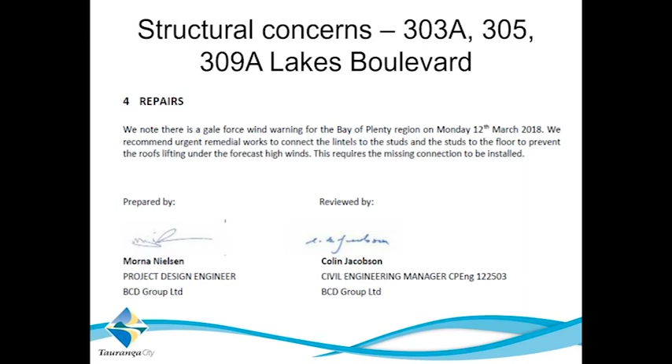Following on from that, we looked at the houses in general, but more specifically the dwellings at 303A, 305 and 309A, because these were the dwellings which were unlined. The reason we looked at these in more detail is that the bones, or the structure, of the dwellings are visible, and we could make a quick assessment as to the level of construction and how significant any issues might be.

As background for a dwelling, you generally consider the occupancy or gravity loads which act vertically, and the wind loads and earthquake loads which act horizontally. As these three houses were incomplete and unoccupied, of these three load types, the wind load was considered the critical issue that could have caused damage to the structure and the adjacent dwellings.

The initial inspection identified numerous structural defects, which were categorised in the BCD report issued on Friday the 9th of March. The ex-tropical cyclone, which weather forecasters were predicting would come through the Bay of Plenty on Monday and Tuesday, could bring gale force winds and heavy rain. The preliminary calculations that BCD completed indicated the gale force winds could induce enough uplift forces to damage the upper levels, or the roofs, of these 3 buildings.

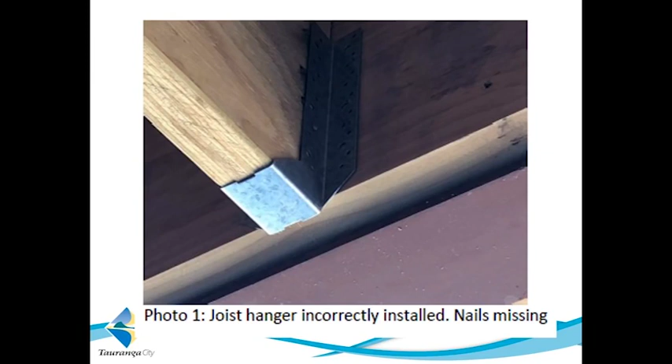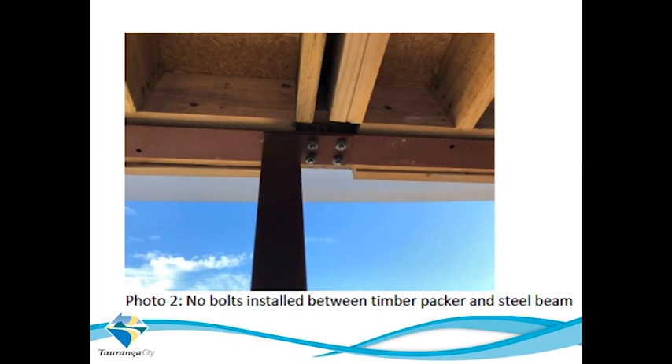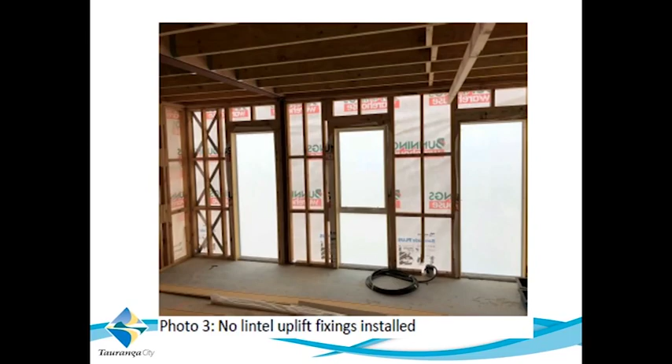In all the cases we looked at on the 3 dwellings, none of these connections were present. The consequence is that in strong winds, when there's an uplift force on the roof, unless the lintels are correctly and securely connected down to the floor, there's a risk that the roof can lift off.

Our concern, obviously in this case, was that the first floor was not connected to the lower level. So in strong winds acting on the side of the dwellings, or in an earthquake, there is a potential for the building to disconnect.

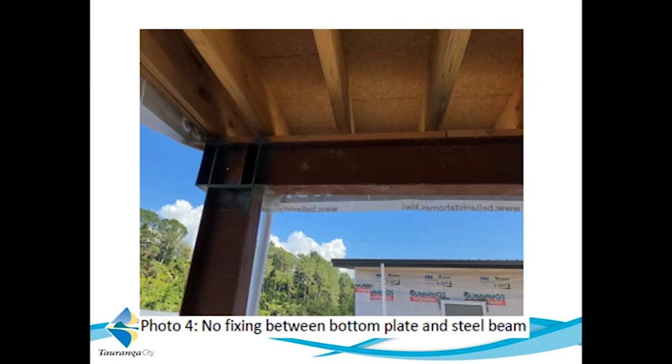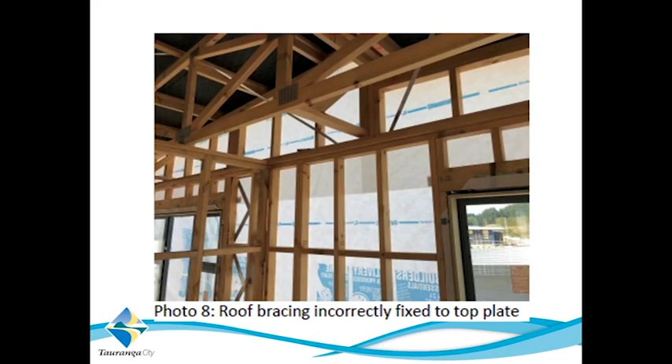In summary, all of these structural issues which we identified drew us to the conclusion that these 3 buildings were dangerous and required urgent works, which were completed by the council on Friday.

Finally, I am a CPEng engineer and a chartered member of Engineering New Zealand. As part of our professional obligations, I am bound by a code of ethics to identify any dangerous or unsafe building practices and ensure immediate action is taken. In this case, I therefore advised Council of my concerns regarding the 3 dwellings, and urgent structural repairs were undertaken to repair the defects. Thank you, and I'll now hand you back to Kirsty.

Thank you, Colin. When we received that advice on Friday morning, we determined that we needed to act with urgency. So we invited Peter Cooney from Classic Builders to come into council and meet with us. The reason we approached Classic was because we identified the need to bring in large-scale resource so that these works could be undertaken expeditiously.

I'm able to confirm that Classic Builders completed the work by the close of day on Friday, and remember I earlier mentioned that our structural engineer had advised that work would take 3 days. I'm going to hand over now to Mike Trigger, who is our geotechnical engineer from AECOM. Thank you, Mike.

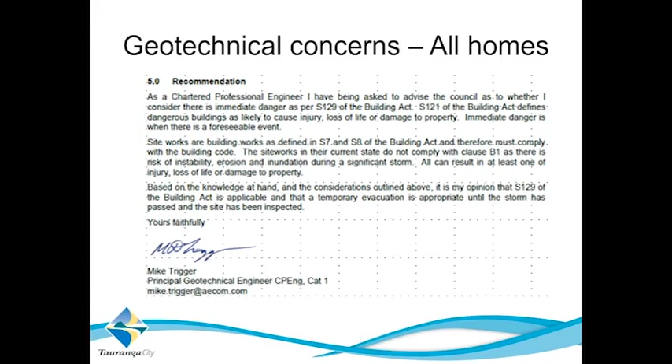As we are in an early stage of our assessment, we are not currently in a position to assess the risk to each individual building. Although some of you have code of compliance, the geotechnical risks can be from works beyond your property. In addition to this, there is clear evidence of subsurface erosion on some of the sites. This presents a risk because we don't know the extent of the subsurface erosion.

In considering the risk during Cyclone Hola, I also considered that the site will change during a rainfall event, and particularly at night, the changes will go unnoticed. Therefore, it was my professional opinion that the sites met the requirements of being immediately dangerous. Like Colin, I am subject to the Engineering Professional Code of Ethics, and it was my duty to notify the council so that you, the owners and residents, could be kept safe.

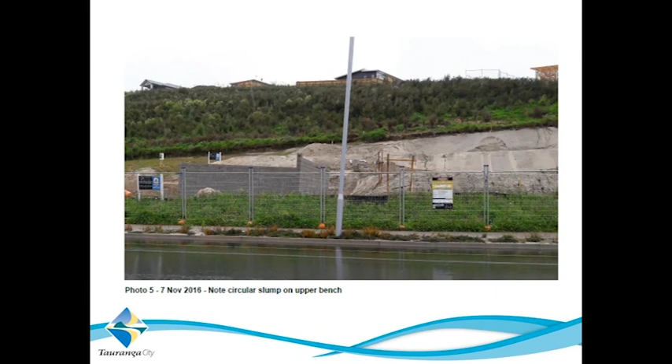This photo was also taken in November 2016. You can see the scale of the earthworks that have been undertaken on this site. What we don't know is how much fill has been brought into the site after the excavations to create the platforms. You can see erosion channels in the slopes in this photo also.

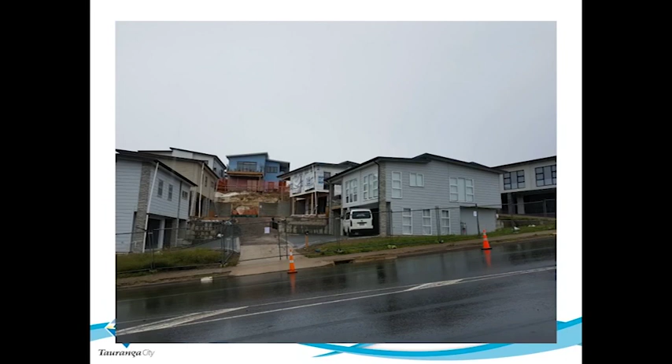This is a photo that was taken yesterday. We have an unstable slope above masonry walls that aren't fully backfilled and below a residential dwelling. I consider this situation dangerous in the terms of the Building Act.

We have engaged a surveyor to undertake a full topographical survey of the current site conditions so that we can work towards solutions for the stability of the sites.

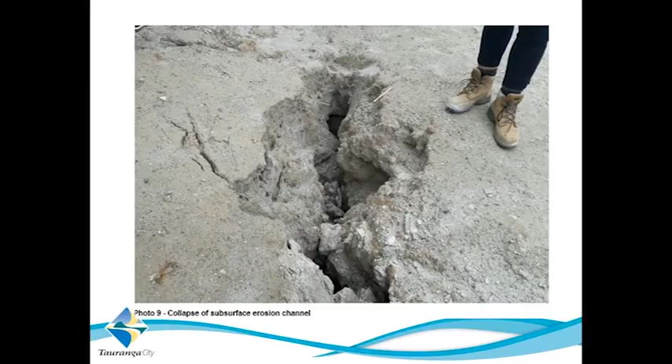Based on these two conditions, the slopes and the subsurface erosion, it was my opinion that the development and all of the buildings are dangerous, and with the forecast cyclone, they were immediately dangerous. We have engaged a geophysics specialist to start undertaking subsurface investigations with ground penetrating radar and shear wave velocity testing, and we expect this to start on Wednesday.

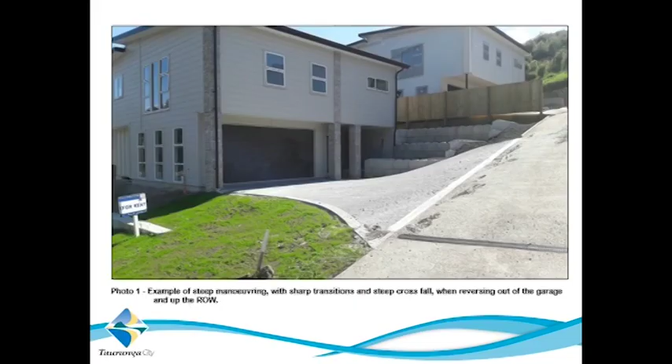I want to now give you a brief overview of some of the other engineering issues that we have identified. We are concerned that some of the driveways, such as the one in this photo, are not functional for on-site manoeuvring and may be unsafe. AECOM's traffic engineer will be providing an assessment of this in due course once the survey has been completed.

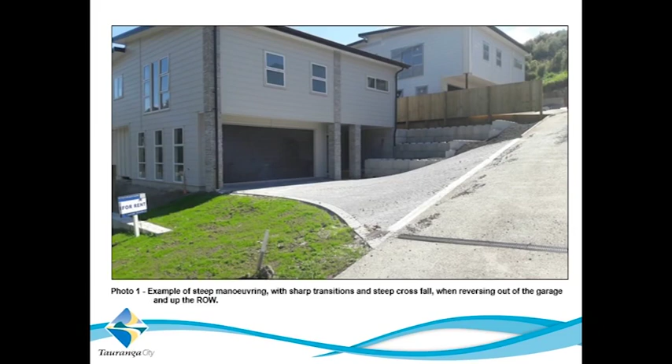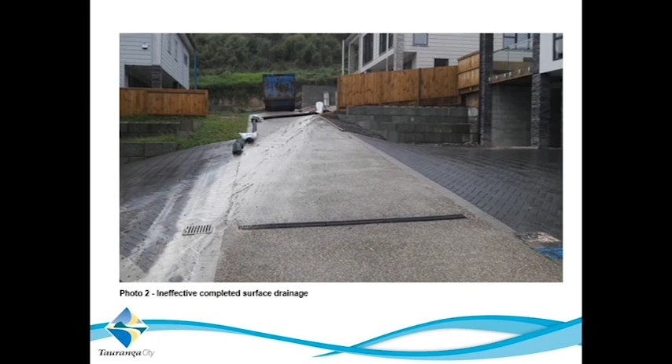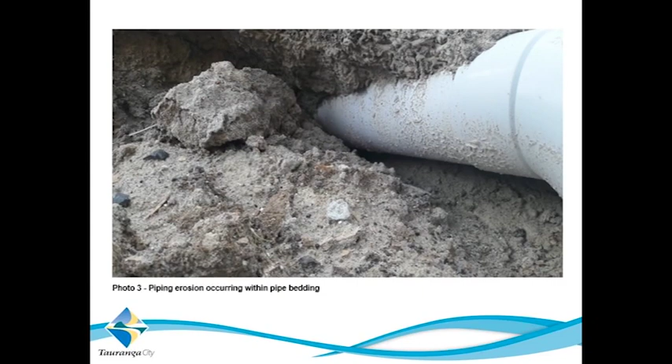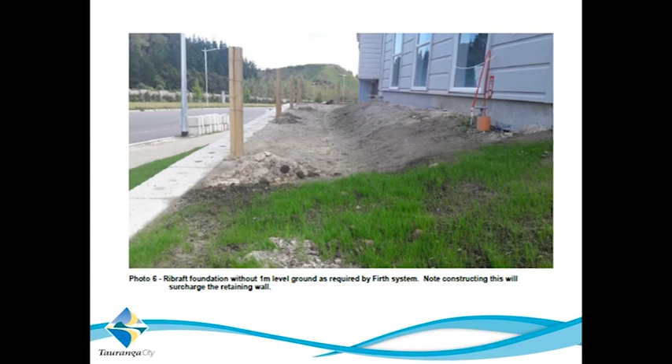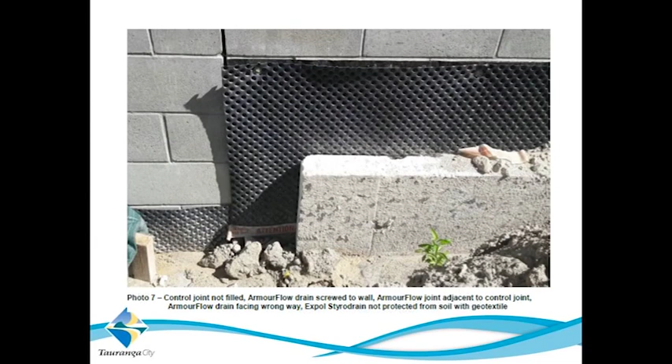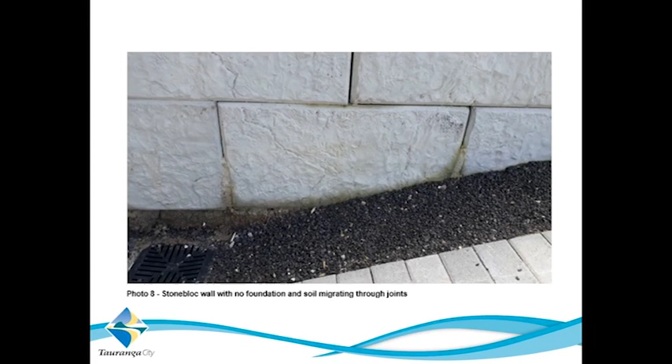You'll appreciate there are quite a number of properties and quite a number of issues. It will take time. The slides I have taken you through today demonstrate the basis for my conclusions on Friday that all 21 buildings were immediately dangerous under the Building Act. Thank you, I'll pass you back to Kirsty.

Thank you, Mike. In this slide we talk about our initial advice. So you've heard from the structural and geotechnical engineering experts. I referred earlier to a property-by-property assessment being undertaken with technical building input.

When Rose McLaughlin was engaged in early February, the focus of her work was to identify what work was required to be undertaken to ensure that the properties that had not yet been issued with code compliance certificates could be made compliant with code. That assessment is ongoing and we're expecting the cataloguing to be complete within the next 2 weeks. Whilst we can't go into a lot of detail tonight, we do want to share with you some of the initial advice, and as I said earlier, we want to be as open as possible.

What we can tell you tonight is that there are a number of issues that have been identified with the properties assessed so far. These include ground and structural issues. Now I'm going to ask Rose to come forward and to talk through an overview of those for you.

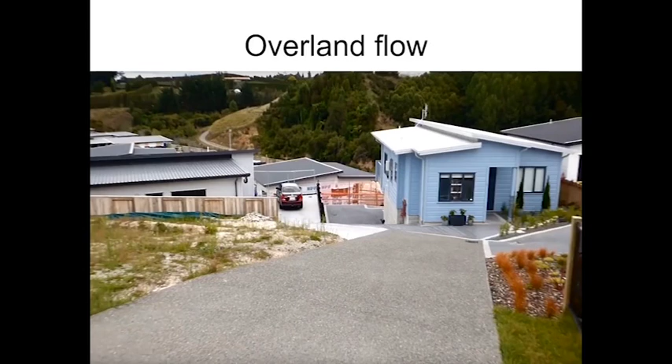And in fact you may see some of that water shooting off the edge of the driveway, a little bit like a waterfall. There's also a lot of grassed areas either side of that which water runoff occurs at as well.

In this slide what you're seeing is you've got 3 Anita Way at the top there, an unsupported cut of about 3 or 4 metres. That cut is partially protected with geotextile fabric, but every time it rains that erosion is a little bit more each time.

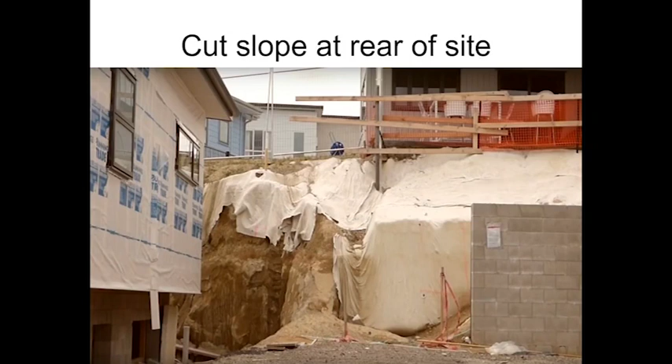So I'm now looking along the back of the site, and again that's number 5, the blue house up the top there, on my left, and on the right hand side are the properties in Lakes Boulevard. The timber is an indication, that piece of timber that's laying on the ground is an indication of some cut that has been done.

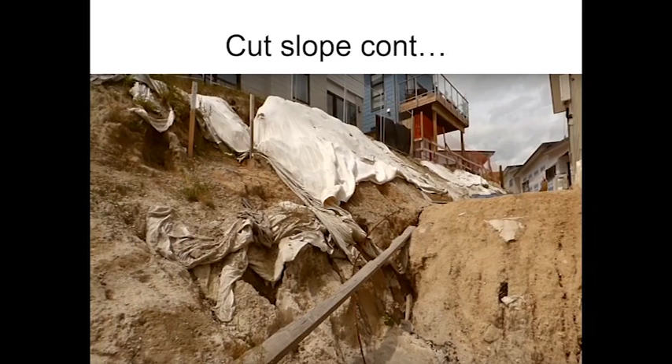So during construction, a block wall, which is out of sight of this shot just on the right, was erected. The dirt was dug away, the wall had a tanking membrane applied, and then it was backfilled. In that backfill you can see quite a bit of construction debris. There's geotextile fabric, bits of timber, bits of steel, bits of plastic. You can also see a little bit of erosion.

So apart from the retaining wall that is necessary between Anita Way and Lakes Boulevard, the individual houses on Lakes Boulevard also need retaining walls. They need to be along the length of the sections and across the sections in between each property, and they are necessary to ensure that the ground does not erode any more than what it currently is.

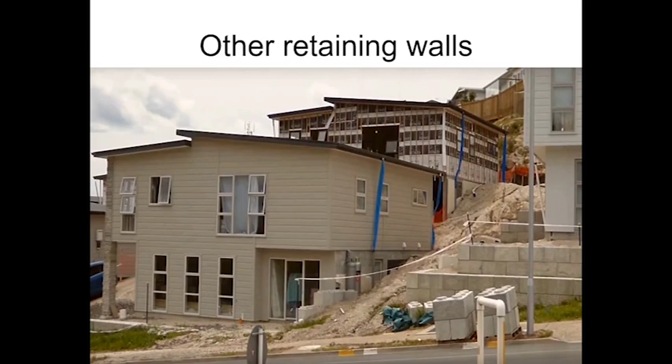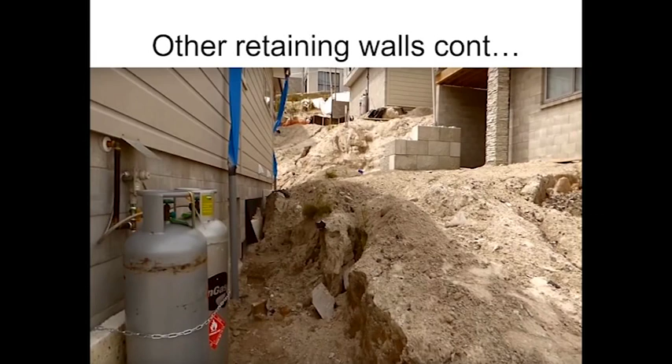We're just going to talk briefly about the floor slabs. You may have heard the term raft floor slab. A raft floor slab is constructed using polystyrene pods, laid out over the building footprint, about 1 metre square. Between those pods there's a gap of about 100 millimetres, and in those gaps you have reinforcing steel and concrete. That's how your slab is formed, and it's critical that it is placed on a compacted platform which extends 1 metre beyond the building footprint.

If you look at the picture up behind me, the top one shows where the building footprint is on the inside, and the 1 metre perimeter on the outside. The bottom picture is a cross section, cutting through the slab, showing the 1 metre perimeter we should have, and the safe slope required for these slabs to remain structurally sound.

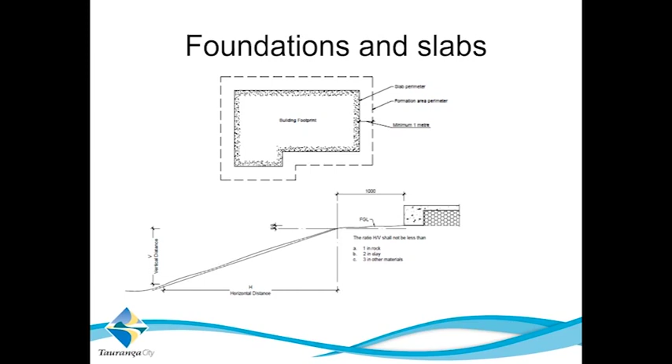Now if we look at this picture, just behind Laurie, up in the top left corner, is a floor slab which doesn't have that 1 metre perimeter. I could have taken this photo on any site - it's pretty indicative of what's happening on all of the sites. It doesn't have that 1 metre perimeter which it needs.

You can also see in the foreground, just where Laurie is standing, the footings for one of the block walls, which has also been undermined as a result of both earthworks carried out on site, and because of erosion - water and rain washing down the slope. You can see some of the cracks forming under and through the ground. So we don't know what's happening underneath this ground.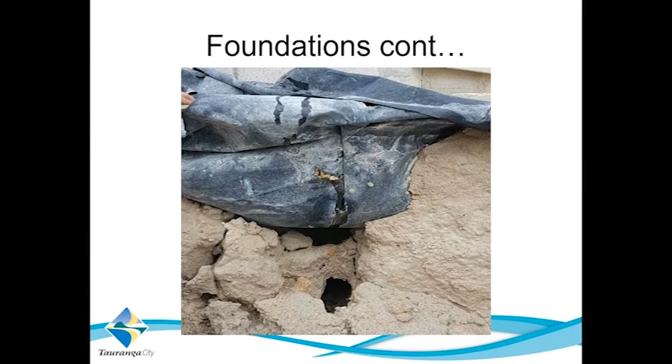That's just another look at that foundation again. You can also see from this picture the 1 metre that has not been achieved out from the slab in the background there.

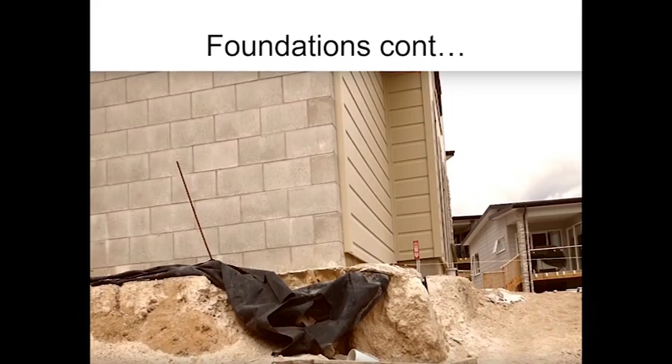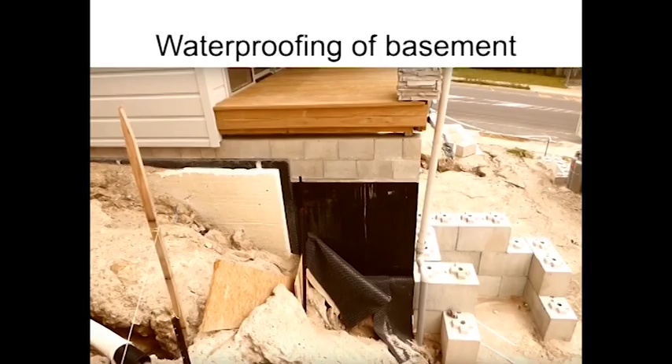Now I'm looking at the back of one of the retaining walls, and Mike has already talked to you about the application of the tanking membrane and how it needs to be protected before it's backfilled. The tanking membrane will break down if exposed to UV and sunlight. Some of these membranes have been put on some time ago, so they've been exposed to that light. They've also been subject to erosion and silt, so a lot of dirt has got in behind, which is causing damage to that membrane.

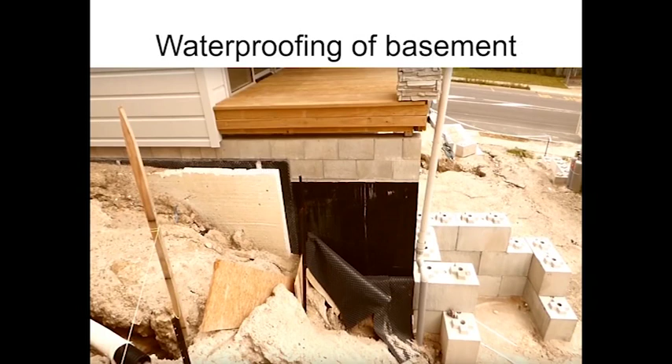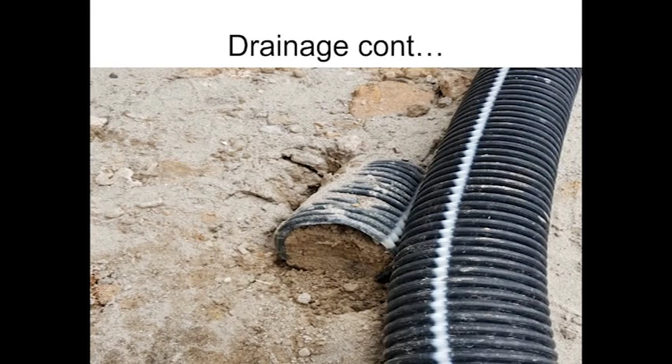At the base of these block walls, we've looked at the tanking membrane, protection measures, and the polystyrene. At the base of the walls we have drain coil - a black plastic drain with perforations. Normally water would dribble down through the metal drainage and hit this drain coil, then be carried off to a cesspit or sump. If you don't protect that drain with geotextile sock and proper fill behind it, the drain will block up like the picture shows. That's part of the reason why some of the drainage on site is ineffective - it's blocked.

Driveways, we've touched on this a little bit, and it's fairly clear that with some of the driveways it would be very difficult for you to get out of your garage, up the driveway, and then drive out onto the road. On this particular site, I'm standing at the bottom right hand corner of the garage, and to my left is the front door.

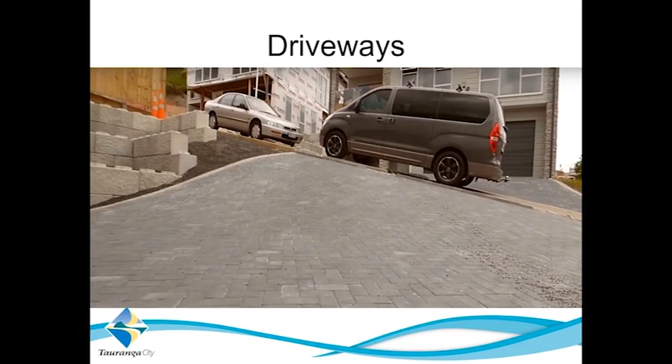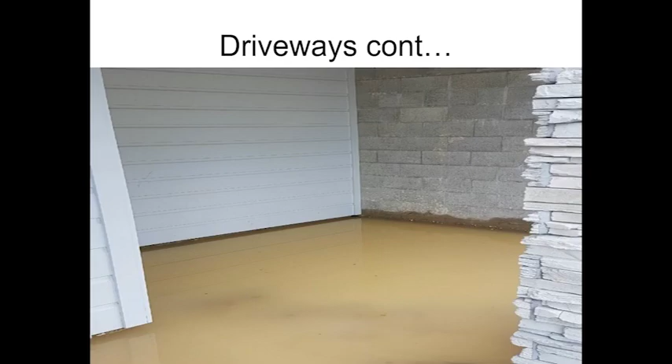Thanks, Rose. So now we are going to talk about what this might mean for you. We absolutely appreciate that what you've seen and heard is hard-hitting, it's confronting, and it's going to add to the uncertainty you're already experiencing. This new information creates further uncertainty and anxiety for you. We've got a dedicated project team committed and working hard to find a way forward. As I said earlier, we certainly don't have all of the answers at this point in time, but we've received feedback and we're wanting to be as open with you as we can be.

We're looking at options and trying to do that as quickly as we can. We've had experts on site today, and they'll be back on site tomorrow to determine whether the site is safe for you to return. We'll then be better informed to advise you on timing for reoccupying the dwellings. I want to acknowledge and give you a heads up that timing may be different for individual properties. At this point in time, tonight, we can't give you a definitive time frame. What I can give you is an absolute assurance that we are working hard and with urgency so we can provide you with information as it comes to hand.